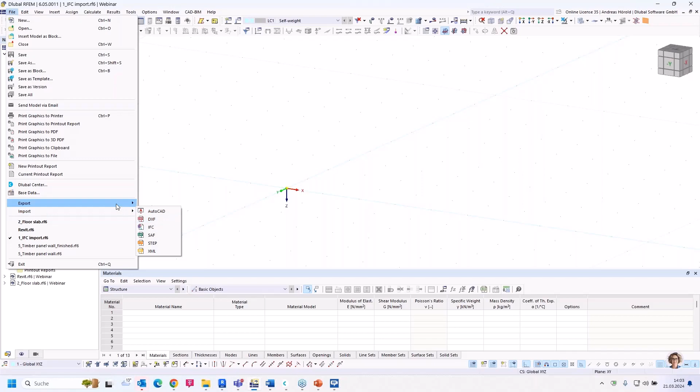Okay, then let's turn to RFEM, an empty model. The first question is, how can I export or import an IFC file in RFEM 6 or RSTAB 9? You can do that via File, then Export. You can see IFC and the other interfaces, then Import, also IFC and the other interfaces. Version 4 is supported for import and export, and the older version 2x3 only works for importing. Regardless of which direction you exchange data, the structural analysis view, the reference view, and also the coordination view can be processed.

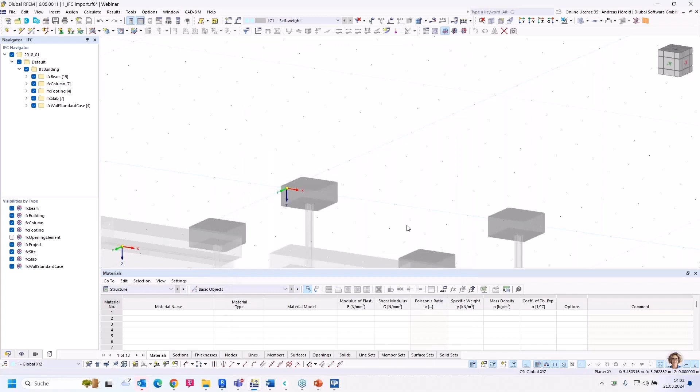So let's import an IFC file, that file. You can choose any coordinates where you would like to import it. Let's press OK. You see the import was good, but the direction of the z-axis was opposite in the CAD model. That's why we do the import again.

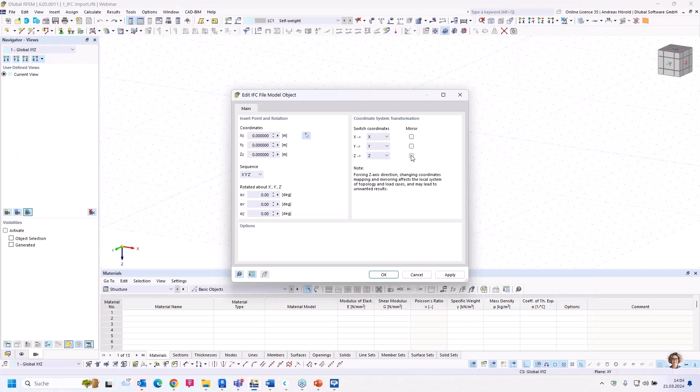File, import, IFC. So, and we mirror the z-axis. Okay, that looks quite better.

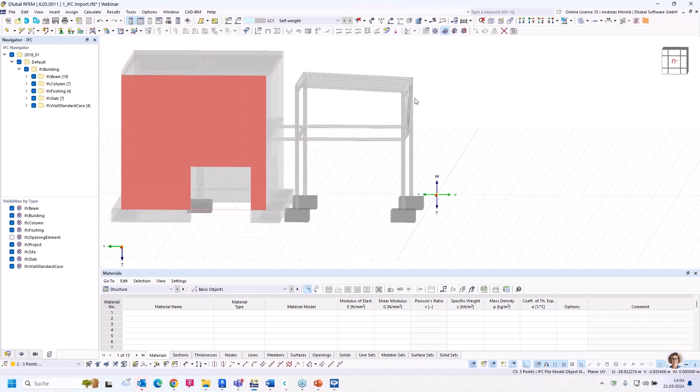Imagine we have to design the steel construction. We ignore the building here, the concrete structure, and let's prepare the model for the design. You can see at the moment it's only an IFC model object. We have to check the CAD-BIM conversion tables.

The steel material has to be assigned with the material from the database in RFEM 6. Also the sections, you can see the different cross sections. Most of them I already assigned, where I assigned already the correct RFEM section from the library. The concrete items are not of interest for us in this example.

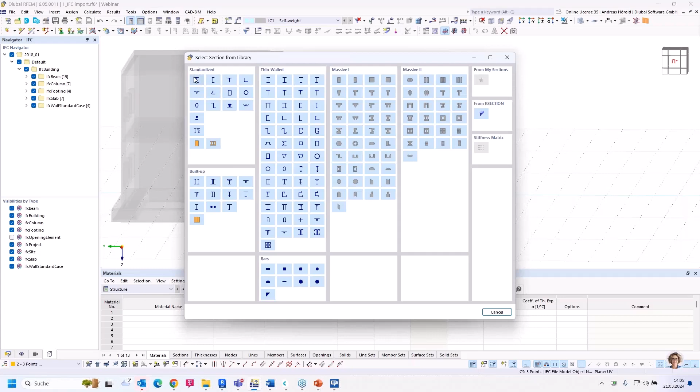Let's assign the HEA 160 from the CAD program. That's a standardized profile. So, HEA 160. Okay, now the list is complete.

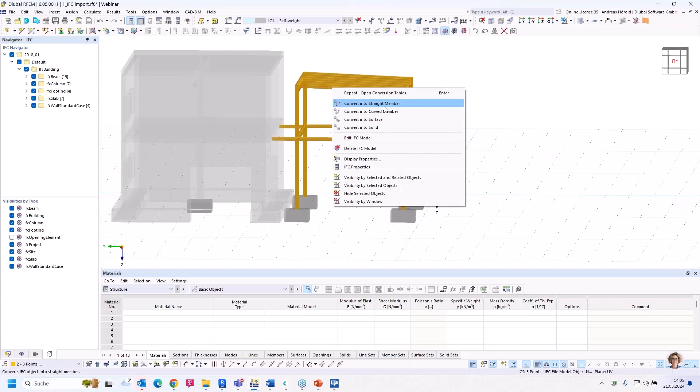So, what we have to do now, we select all, and then with a right click, we convert the whole construction into straight members. Let's disable the other IFC objects here in the navigator, IFC, on the left side. Now there's only the steel construction.

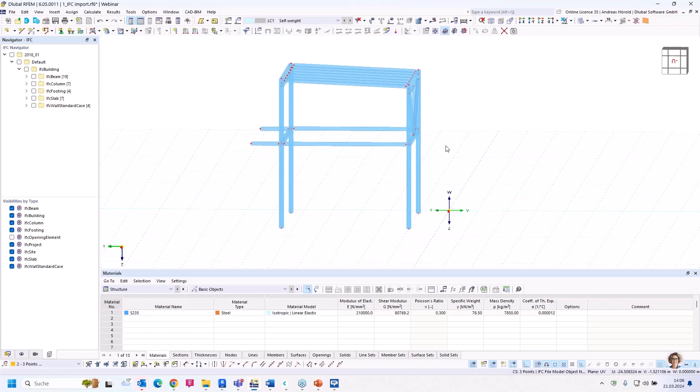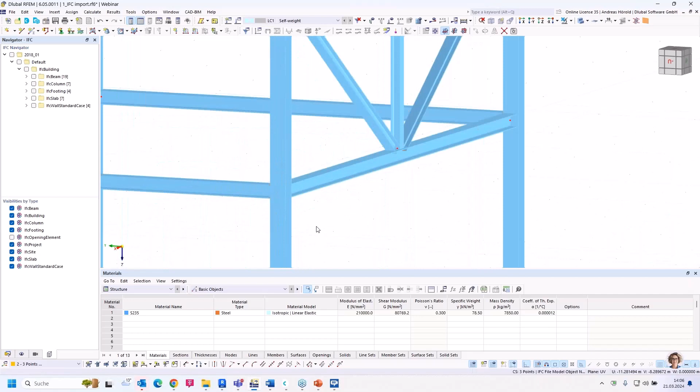Yeah, that looks quite good, but only in the transparent or solid model. When we take a closer look in the wireframe model, you can see the members are not connected to each other. Let's turn back to the solid model. In the CAD model, the horizontal beam here is connected with the flange of the column, and so on. But we need the axis of the members, and they need to be connected.

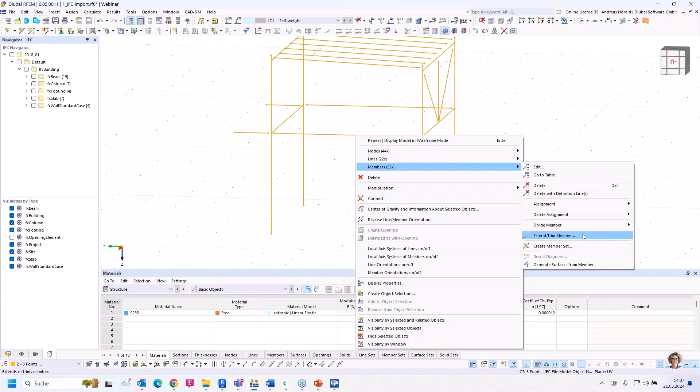So let's turn back to the wireframe model. There's a function in RFEM 6 for how you can correct such things. I select all, and with a right click, I can modify the members with the feature Extend/Trim Member. Let's do that. We would like to extend them to the next member or line on both sides.

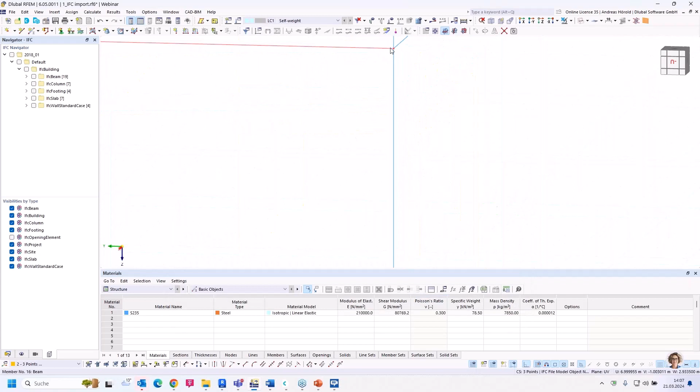Okay, that looks already quite good, at least at this node and the other nodes. But you can see the purlins are not yet connected because we have an offset, but we will correct it. In that case, also for the bracings here, we have to do that manually, for example with drag and drop. So here the same.

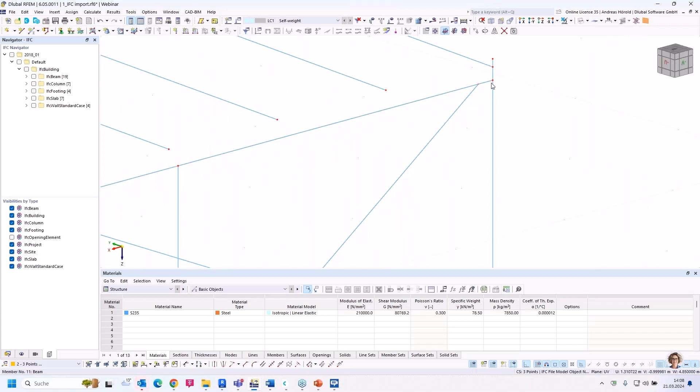Also on this side. Okay, so now we come to the purlins.

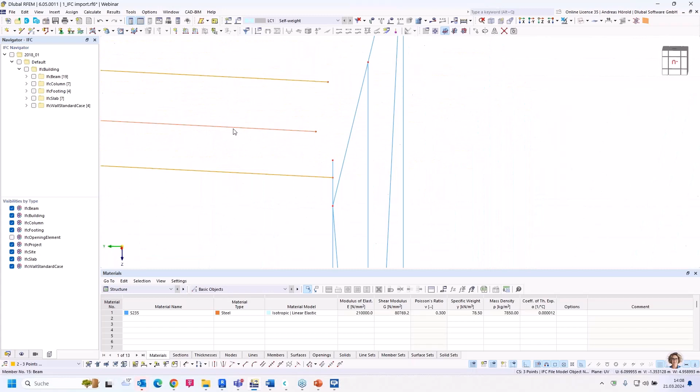I use this function that connects the members or divides them with a node, so I can, for example, delete such a member. But in the first step, we move the roof members to this node with the move copy function.

So with a vector from this node to this node. Okay.

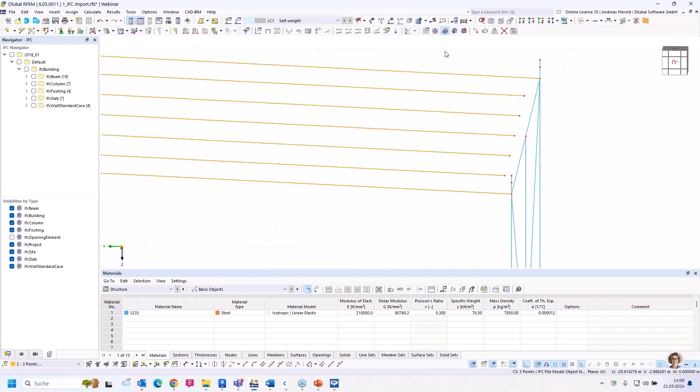So let's turn to the minus-y view. So I delete these parts of the columns. Also this one.

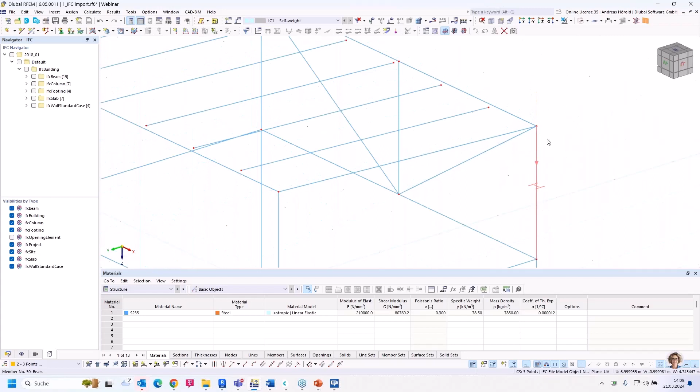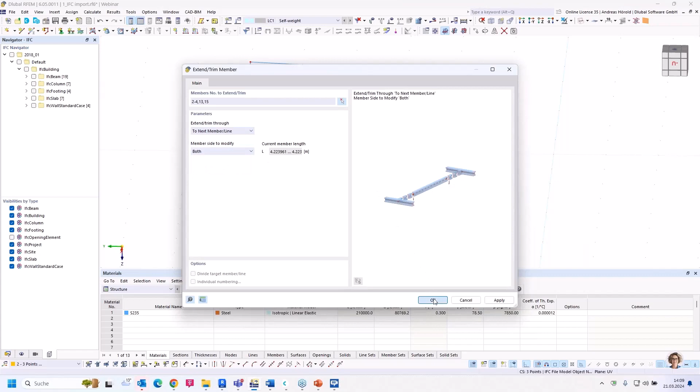So now I need to extend the purlins. I select them, then with a right click I turn to the already shown feature, extend/trim member, to next member line on both sides. Okay, that looks already quite good.

In the first step, I would like to change the bracings here, with a double click for example, from beam to truss.

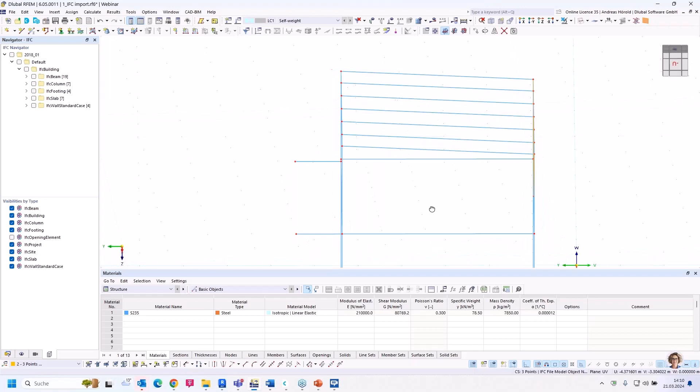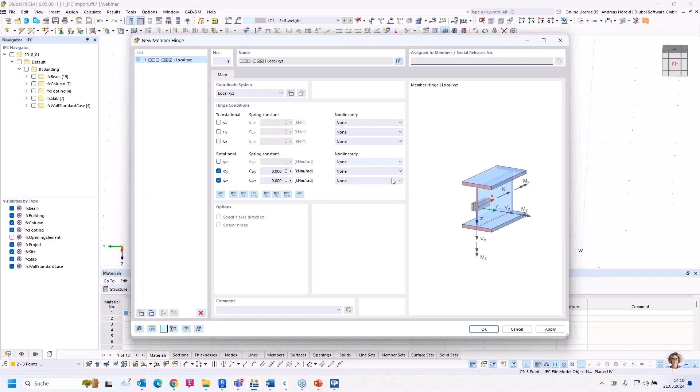So now I change the purlins, or I add hinges. Double click, hinges, go to the table hinges, and create new hinges around the Y and Z axis of the member. Typical moment hinge on both sides.

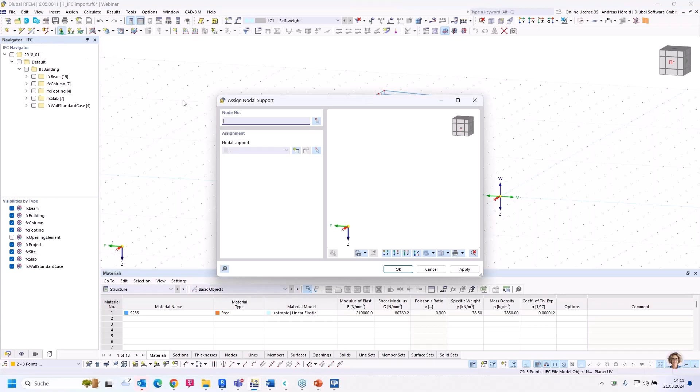Then we need to add supports. So I add supports here, left above: nodal support in all directions and around the Z axis.

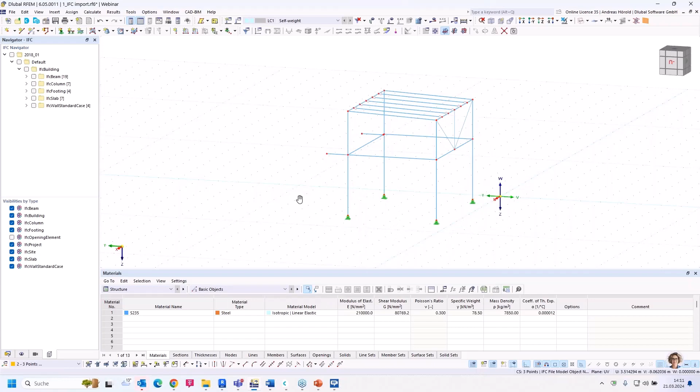And the columns are supported now. And we create also supports on the concrete wall here: new nodal support in all directions and around the y-axis.

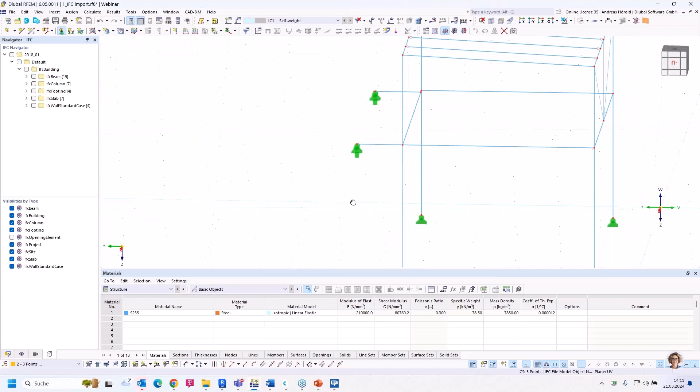Yeah, that should be all. The model is now corrected or modified. We can go to the tools and do a plausibility check. All is okay, and let's calculate the self-weight load case.

Okay, we get results. That means all is connected correctly. And the model can be, we can assign other loads, snow and so on, and wind, and calculate the structure.

Now you can see it's quite complex to modify such an imported model. It depends how good the model is created in the CAD program.

Now there are other possibilities, for example with the direct interfaces from RFEM to Tekla Structures, or to Revit, or from Revit to RFEM.

Let's show that. I turn to Revit, and if you create a physical model and in parallel an analytical model, you can also create supports and so on.

And if you export such a model, you don't need to modify so much as I showed for the IFC model. Let's do that. We turn to RFEM, the RFEM tab here, or dialog.

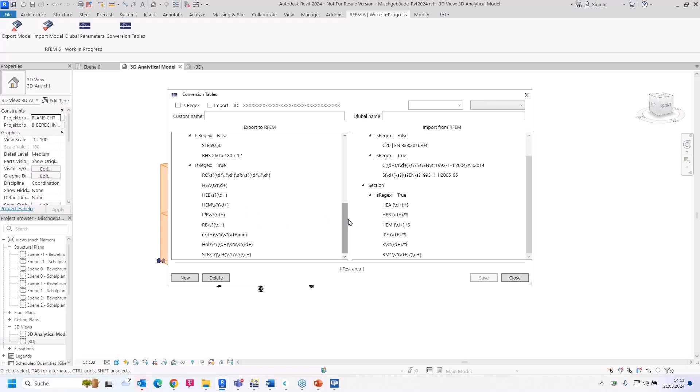There are conversion tables. You can also add different cross sections that need to be transferred, and then you can go to the export.

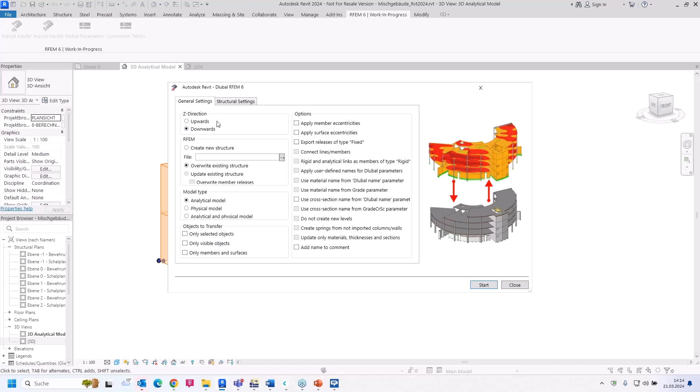You can select if the Z-direction is upwards or downwards. You can overwrite the existing structure and so on. You can transfer the analytical model or physical model. You can do structural settings. You can transfer nodal and line supports and so on.

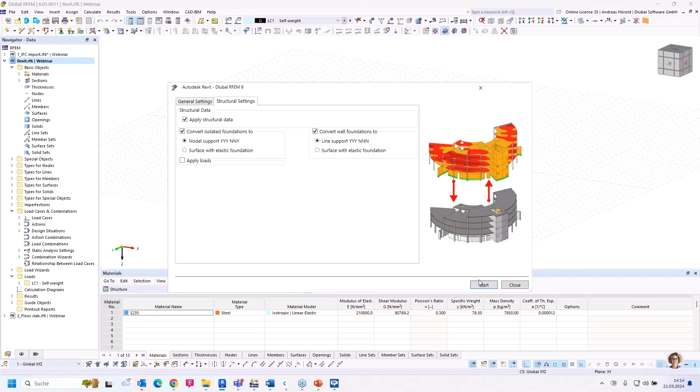I need to go back to RFEM and go to an empty model. It's an empty model. So now I start the transfer. Start, okay, now that takes only some seconds. We go back to RFEM.

And now you can see the transferred model. That looks quite better. We can turn to the wireframe model. All members are connected and so on.

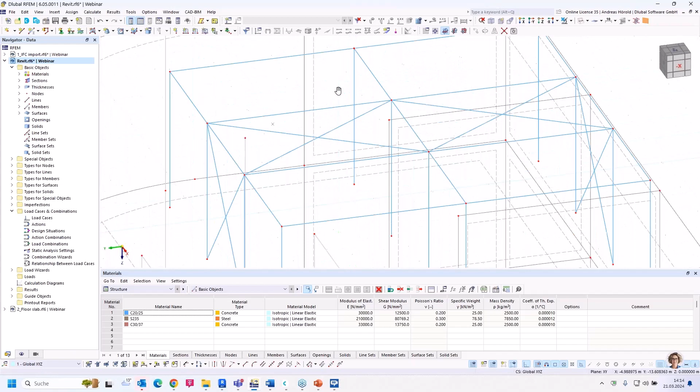So let's calculate the model. I create the static analysis settings and calculate the load case, self-weight in that case.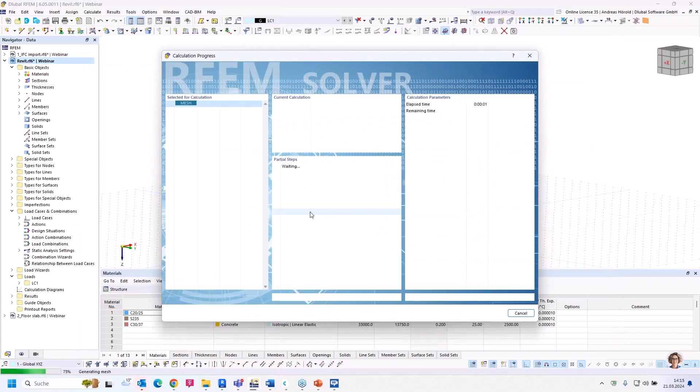So the same workflow is in Tekla, the input is analogous. And as I already said, the better the model is prepared in the CAD program, the less additional work is necessary in RFEM.

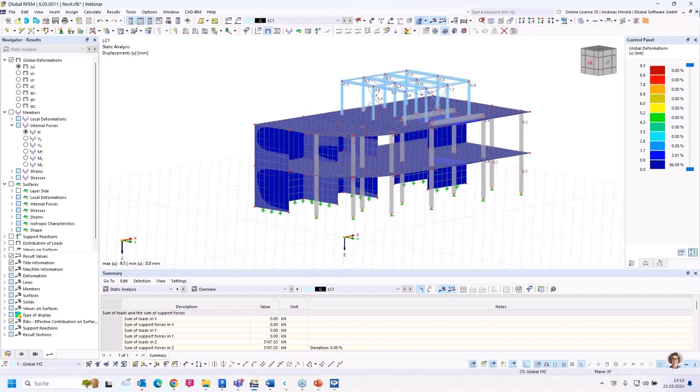Okay, so I close that model, and I save this model. And we turn to the next question.

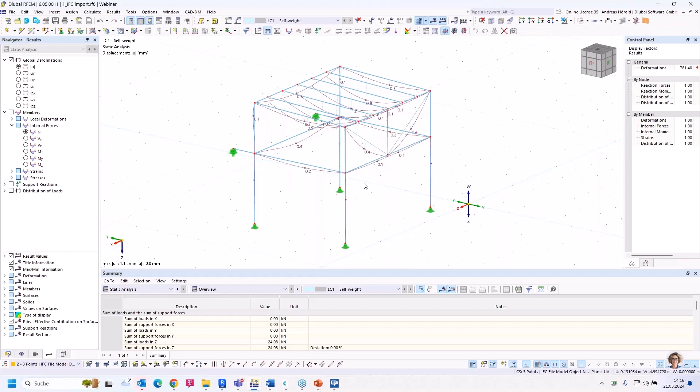The next question is: can I transfer a support load to any location in the target model without defining a node here? Yeah, that is possible. I would like to show you how to do that.

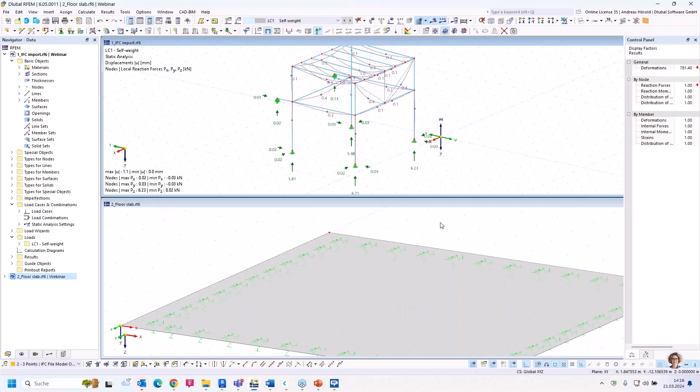I open also the floor slab, or I show both windows. Okay. We would like to transfer the support reactions to this floor slab. Let me switch off the user-defined coordinate system from the CAD model. You can see the steel structure is in the positive Y direction and the floor slab is in the negative Y direction. Yeah, and for the feature that I would like to show you, that doesn't matter.

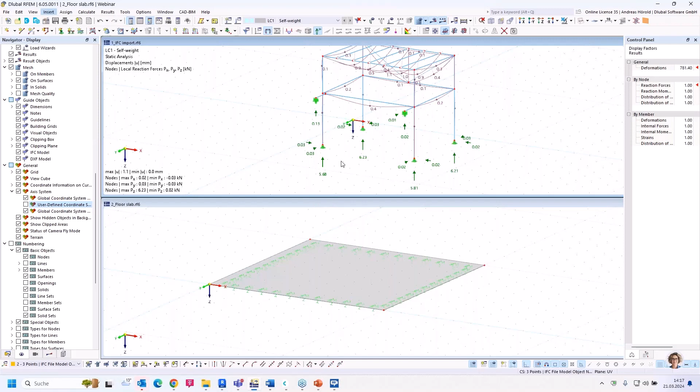Let me rotate it a little bit. Yeah, we would like to transfer those 4 support reactions on any place of the floor slab. How to do that? We turn left above to insert, or at first we would like to show the numbering of the nodes. Okay, that's quite important. And I add also dimensions in the structure. Okay.

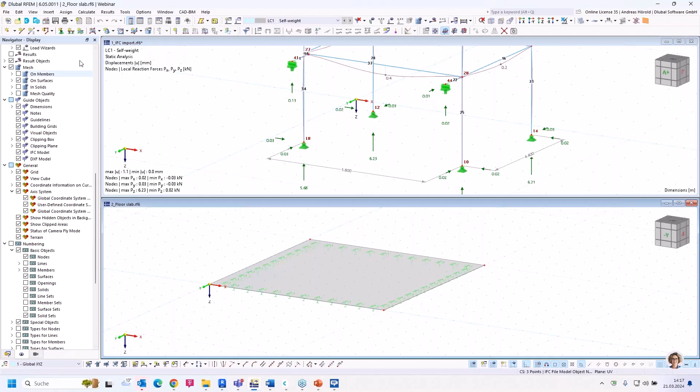So 5.8 meters in X direction and in Y direction 4.4 meters. So then we turn to the floor slab, then insert loads, concentrated loads. The feature that I show you will be released in a short time for line loads as well. I showed it for the concentrated loads.

I have to select import support reaction, and with this button I define the location of the loads. So let me select the point. For example, this point. Okay, and I have to define the node number or select the node number. That's the model name, IFC import. It must be in the same folder as the target model.

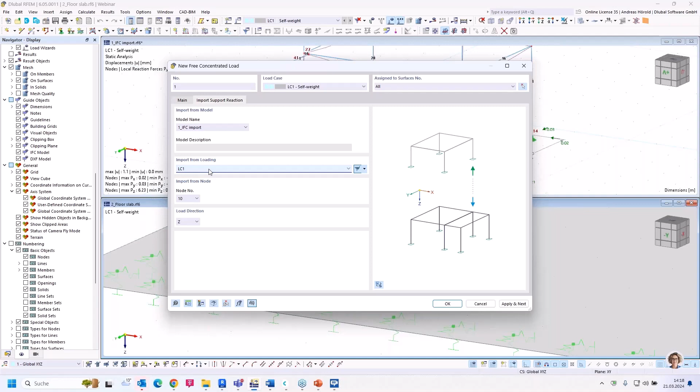Yeah. So then here you can select the load case here and the node here. That's node 18. Okay. In Z direction. Okay. That's all for one support reaction. We need to copy that load, 5.8 meters in X direction.

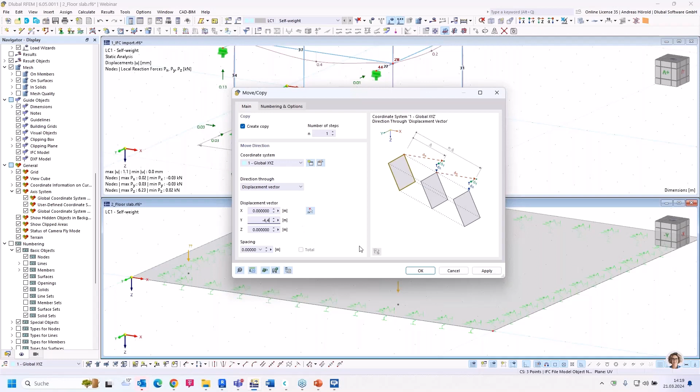Copy. Okay. So, and then both loads in Y direction, 0 and minus 4.4. Okay. So now we have to assign the nodes, node number 10. Okay, node number 10. This one, node number 14. Okay, and for this one, node number 12.

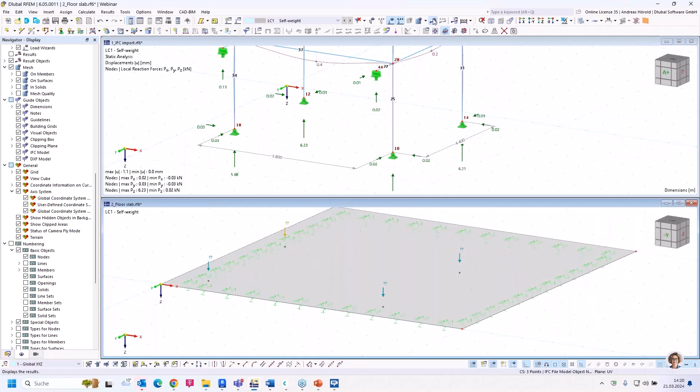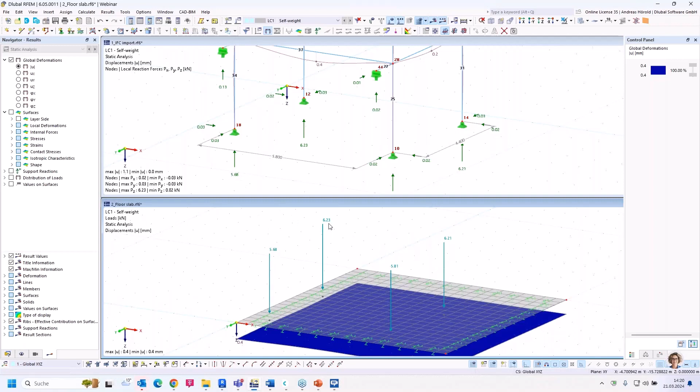So then we need to calculate the load case, and the loads were transferred from the original model to the target model. Takes some seconds. Okay, so now let's compare the values. 5.68, 5.68, 6.23, and so on. It matches for all the 4 loads.

Yeah, okay, that's also a little bit complex, but you are absolutely free on the locations in the target models or model. And the other feature that I already showed in a previous webinar is insert load wizard, import support reactions, load wizard. And with this dialog, you can transfer all supported nodes to the target model.

At the moment, you have to select the single nodes in the target model, but we will implement a feature that you don't need to select any single node. The program should detect where the different supported nodes are, or the loads from that nodes are transferred into the target model. And that's our future plan to improve that feature.

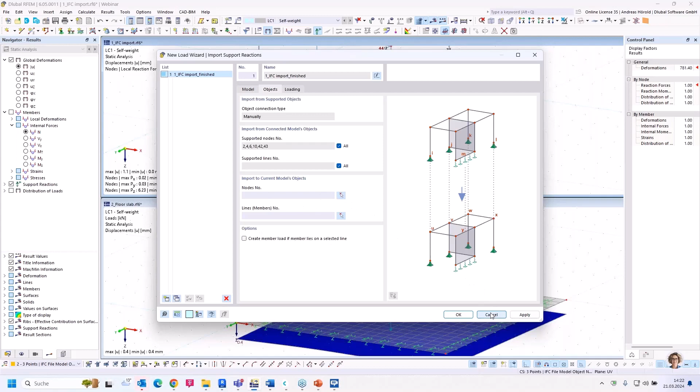Okay, then we turn to the next question. I open the next model. And the next question is, are offset moments that occur when notching cross-sections considered in the design? Yeah, the answer is yes. I would like to show you that on an example.

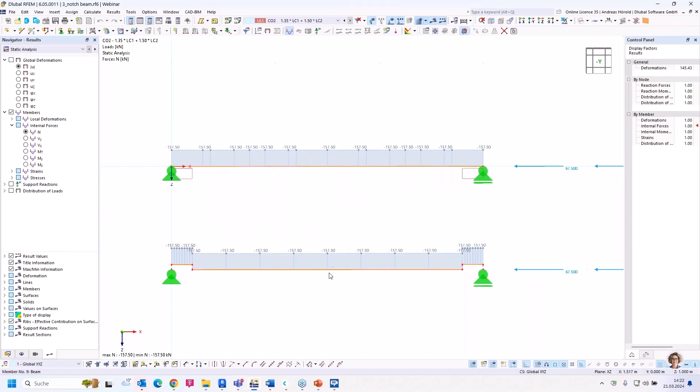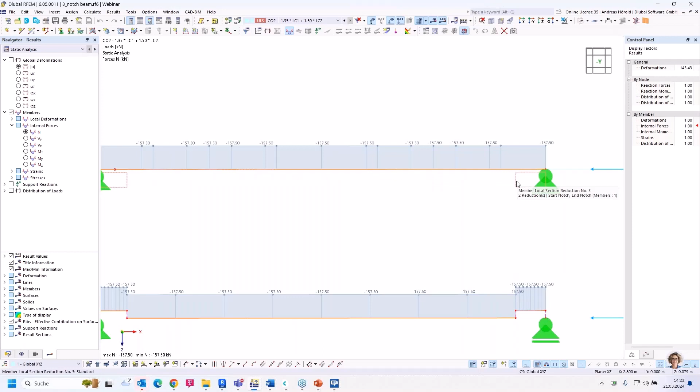You can see 2 single-span beams. I turn to the solid model, and you can see notches here at the start and the end point. For the upper model, I defined that with a design property, and for this one, I created different cross sections. Cross section with a height of 140 millimeters, and on this place 240 millimeters.

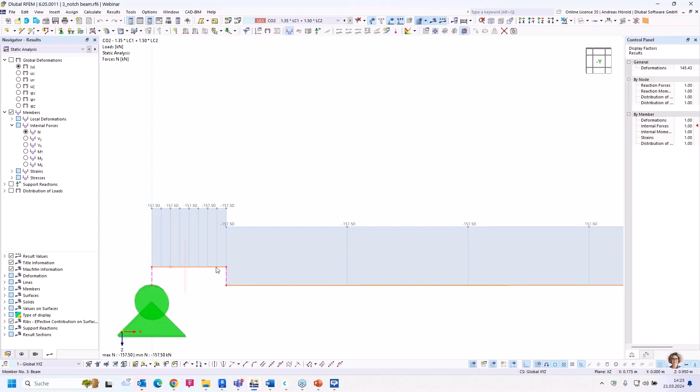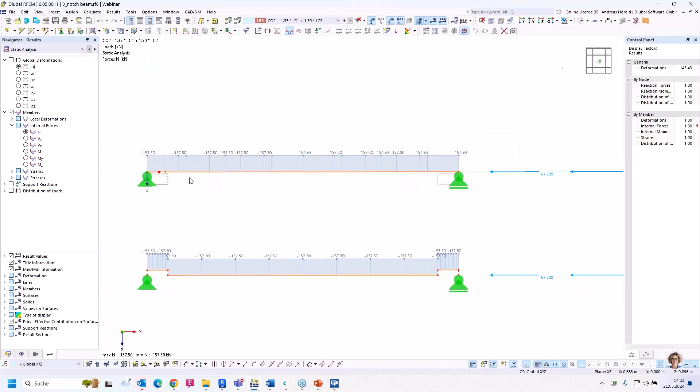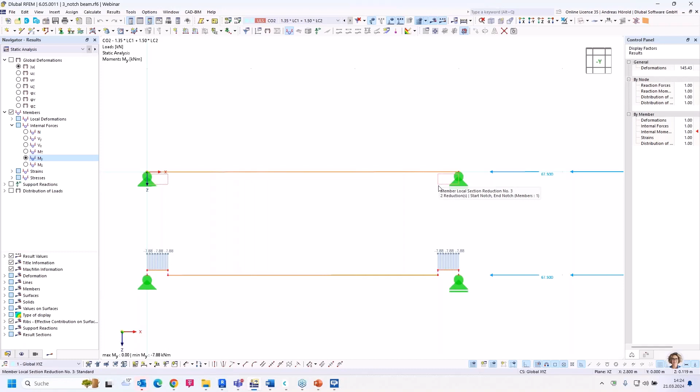And that's the notch, and the axis of the member is higher than this one without notch. So, and you can see the internal forces are the same in both models, at least the normal forces. So, but for the MY internal forces, you can see there's an offset moment in this model, but not in the upper model. But I created design properties for this member, and later this offset moment will be considered in the design.

So I show you the properties of the member with a double click. Go to the design types, and you can see where our local section reductions are created. So at the start, we have such a notch with a length of 20 centimeters and a depth of 100 millimeters. And the same at the end of the member. Okay. And I simulated the same notch with this model. Those are rigid members.

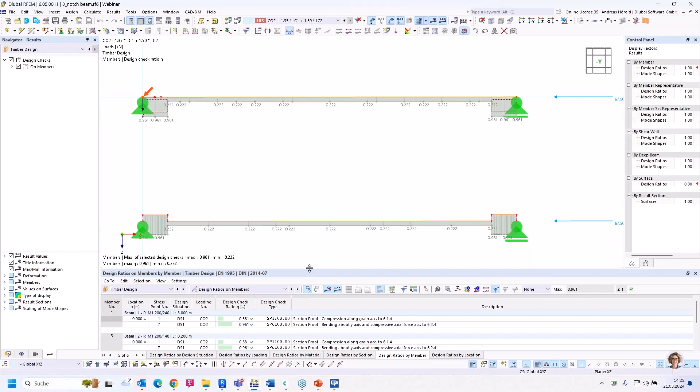Okay, and let's go to the design, to the timber design. So I go to the design ratio by member. You can see all the design ratios are the same in both models.

0.22, 0.22, at the end and at the start 0.96. Okay, and that's member number 1. That's member 1 in the table.

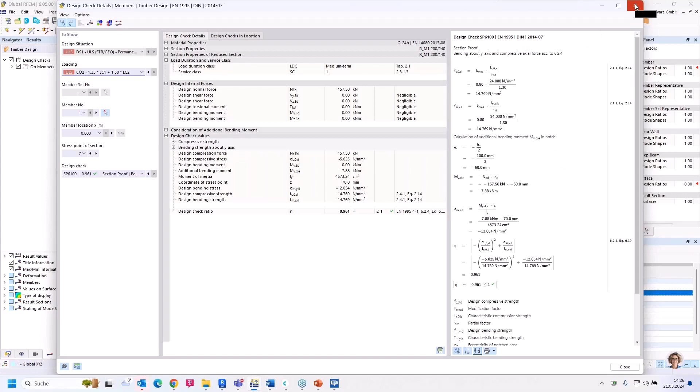I double click on that line, and you can see in the design checks the calculation of additional bending moment is considered: the normal force with the eccentricity because of the notch, and you can see that it is considered. That's the answer to the question. Yes, the offset moments were considered in the design.

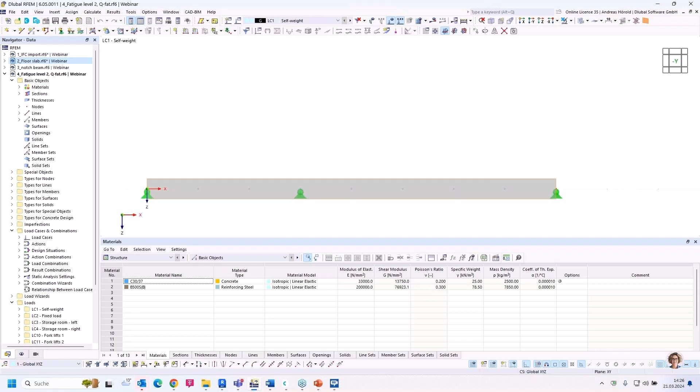Okay, then we turn to the next model and the next question. The next question is, how do I consider the Qfat value for level 2 fatigue design for concrete components? That's a simple model, a 2-field beam of concrete, different load cases: the self-weight load case, fixed load, storage room left and right, and forklift loads in different places. We simulated such a moving load.

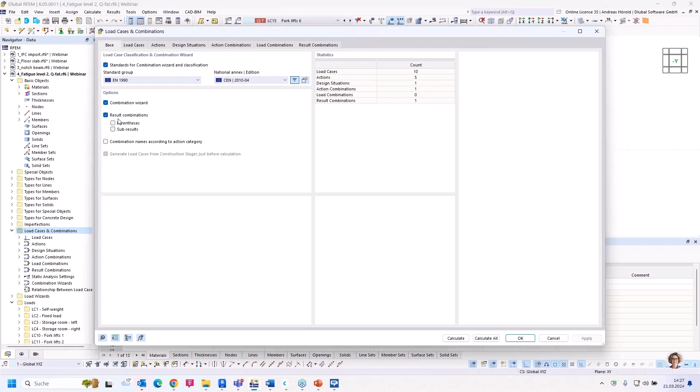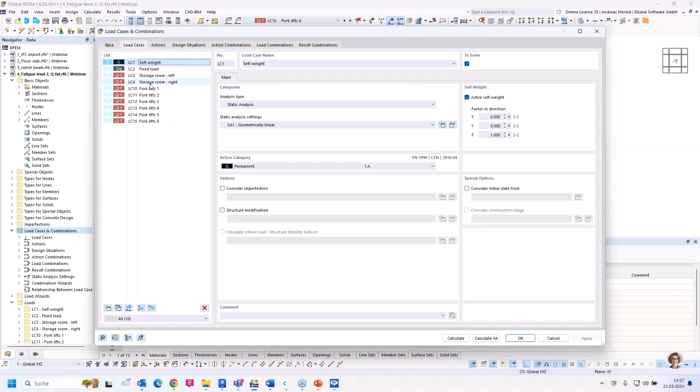So, let's turn to the load cases and combinations. We created result combinations, then the load cases, and for the forklifts, I selected in the additional settings "consider as fatigue load" for all forklift loads and not for the others. The fatigue effect is generated in the actions as soon as a load case has been given the option. You can see the fatigue action.

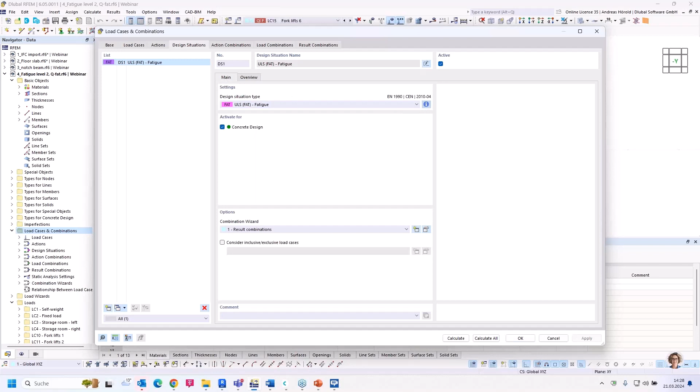So then let's turn to the design situations. We have one design situation, ultimate limit state, FAT, fatigue. Okay, and the result combination is selected. At the moment, it only works via result combinations. You can see the forklift load cases 10 to 15. And if we click on the info button, you can see the fatigue loads are considered 1 time. Okay, that's all for this question.

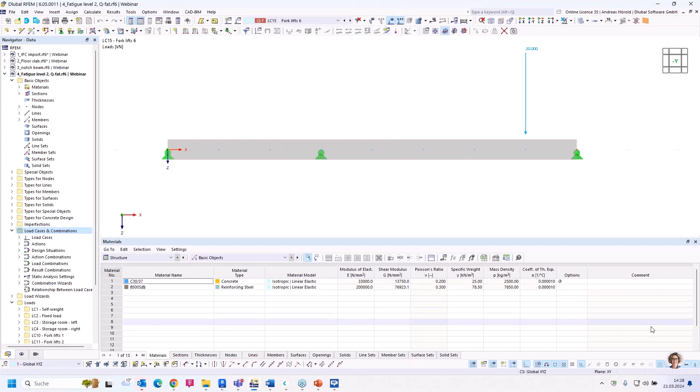The next question is, what is the purpose of the artificial intelligence assistant MIA in the program interfaces of RFEM and RSTAB? You can see on the right side at the bottom, the MIA. If I click on it, I can enter a question here. The reason is 24/7 help with the program, so you can ask MIA anytime, in the evening, early in the morning, or at the weekend, so that you get help anytime.

You can move the MIA in any direction or to another screen. You can also switch off the dialog here with that button. Let's enter a typical question here: What can I do if RFEM reports an instability in the structure during the calculation?

When you enter such a question, it is connected to the website, and MIA searches the Dlubal website, the FAQs, the product features, or the knowledge base library for an answer, and gives you the answer, for example, for this question. And you can do that, as I already mentioned, anytime. Okay, that should be all for this question.

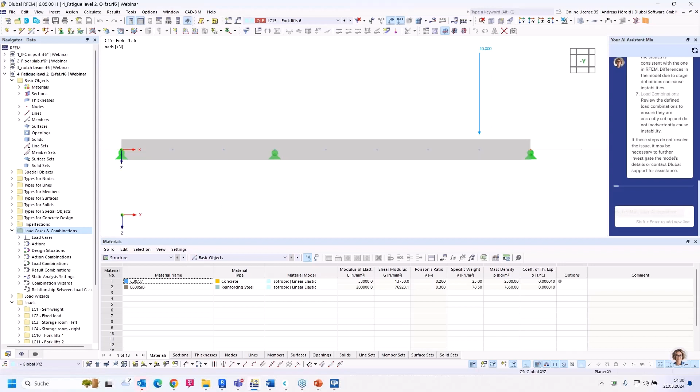I turn to the last question for today. The question is, can timber panel walls be created in RFEM? That's an often asked question. Let me switch off the Mia. Yeah, that's quite a new feature, and the answer is now yes, we can create timber panel walls. I would like to show you how to do that.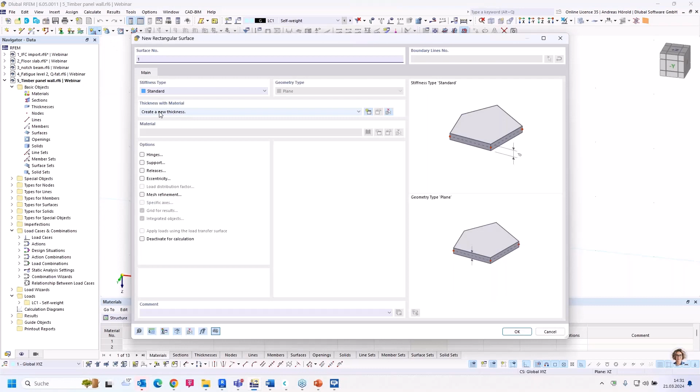I create a new rectangular surface and I have to create a new thickness. The new thickness type is beam panel. With that beam panel, you can create a timber panel wall, for example. You can see that in the preview. Let's fill out the different dialogs.

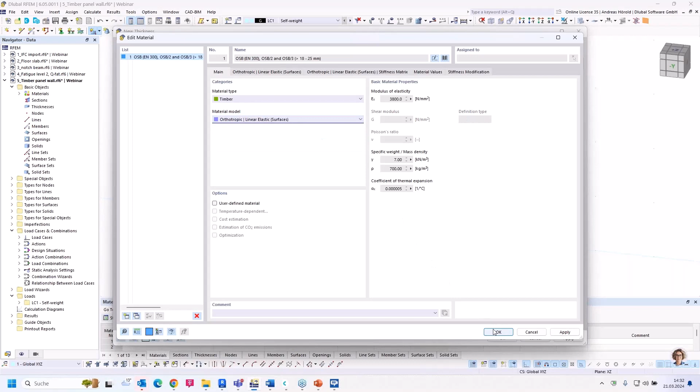We have to select the material. I turn to the library, timber, then an OSB sheet with a thickness of 10 to 25 millimeters. My sheet should have a thickness of 19 millimeters. Okay, but we have to select another material model, an orthotropic linear elastic material model. Okay, let's enter the thickness, 19 millimeters.

For the sheeting on the back side, the same sheet, an OSB sheet with a thickness of 19 millimeters. Then the framing members, the horizontal members and the vertical members at the outside here. We have to define a section, a massive section, with of course another material, not OSB, but solid timber. I choose Eurocode and then softwood C24.

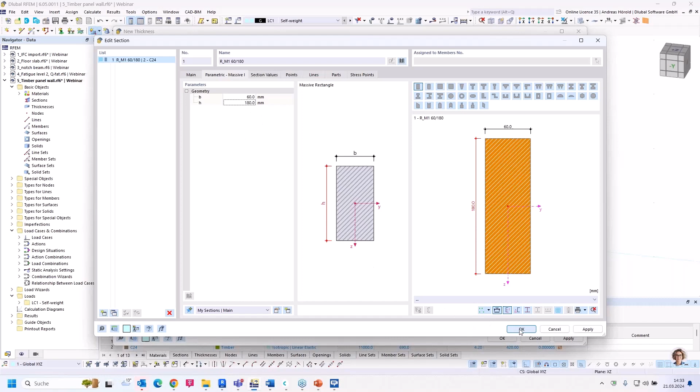Okay, and I have to enter the parameters, 60 millimeters and a height of 180 millimeters. Okay, so then you have to select the connection type: nail, staple, or user-defined. Now, in my example, I choose nail. Then I enter the connector dimension, 6 millimeters, and a spacing of 100 millimeters. Okay, so the connector stiffness is calculated automatically.

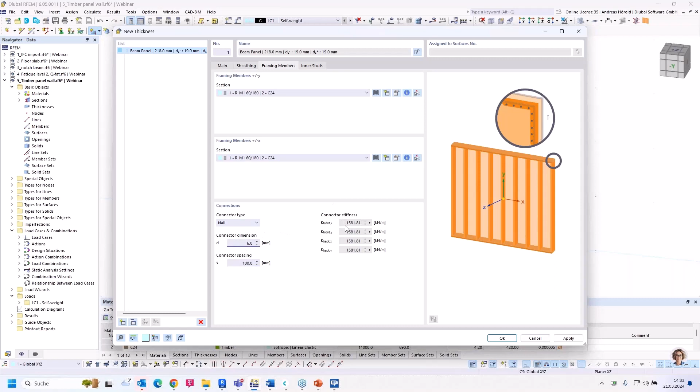Let's turn to the last dialog here, the inner studs. I choose the same section, 60 by 180 millimeters. The distribution should be entered center to center, or gap, or uniform, or user-defined. I think center to center is the most common entry. I have to select the spacing. A typical spacing of the OSB sheets is 62.5 centimeters.

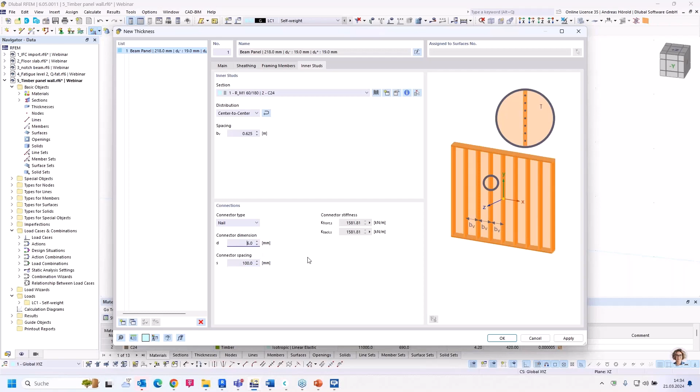Then also I have to choose the connector type. Also nail in that case, 6 millimeters and a spacing of 100 millimeters. Okay, that's all. I have to select the dimensions. For example, 5 meters width and height of 3 meters. And you can see the wall.

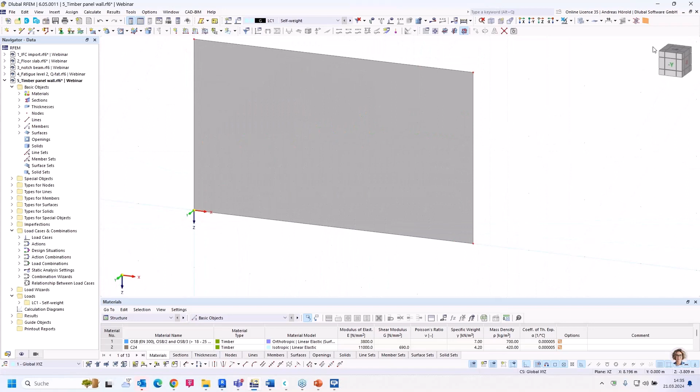And with that button right above, you can display the beam panel. And now you can see the submodel. You can see the sheets on the outside. Then the beams with hinges, but it's quite stiff in the direction of the wall. Let's check that.

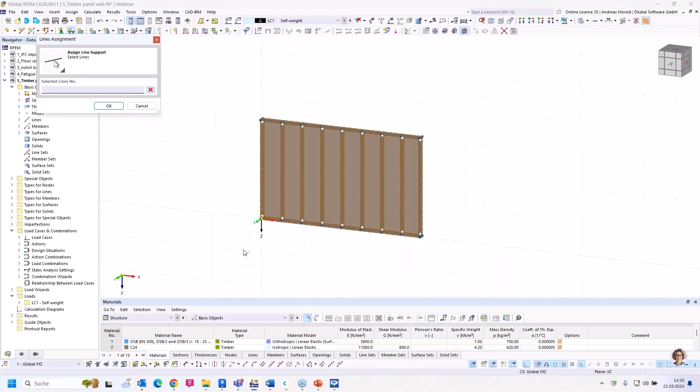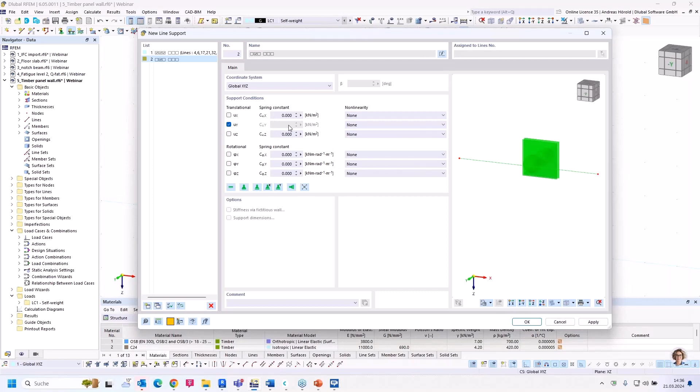I enter left above here line supports. I select the line. Okay. Then line support, create a new line support in all directions. Okay. And for the upper lines, I select another line support, new line support, only in Y direction. Okay, in Y direction, so that the wall doesn't fall down to one side, for example. Okay, and I select these lines.

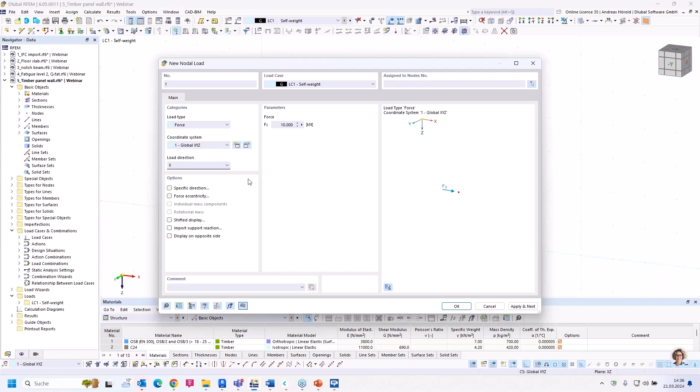So then I enter a load, a new nodal load. For example, 10 kilonewton in X direction. Sorry. Okay. In that node. Okay. And let's calculate, and let's check the deformations. 0.4 millimeters. I can see that it's quite a stiff construction.

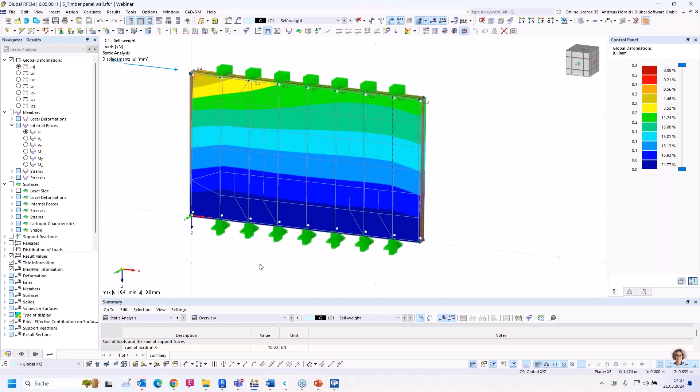Okay, that should be all for today's questions, or the questions that our customers asked the last time. I would like to show you where you can find the recording of this webinar and the models. We uploaded the models there. But before I do that, I would like to go back to the PowerPoint.